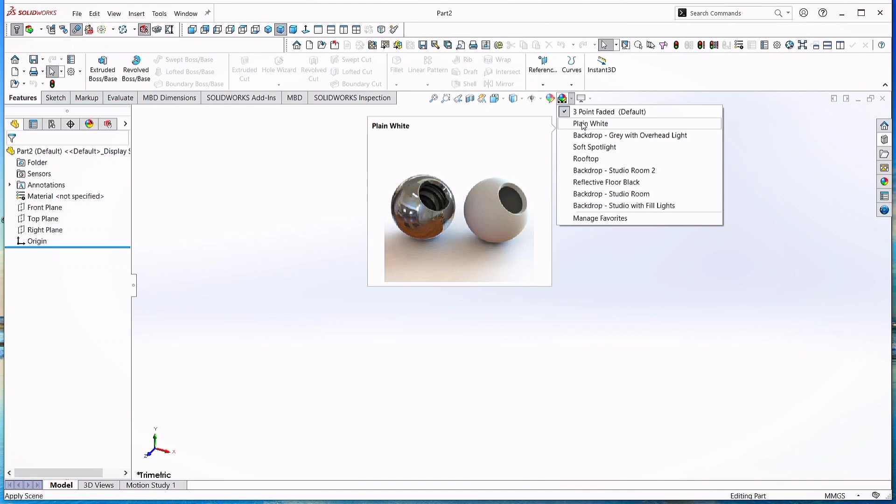Go to the visual background scene, select plain white. Click on sketch and select the right side plane. Now take the circle command, and draw a circle here in the origin. Click OK. Take the Smart Dimension command, and give the circle diameter as 32 mm, click OK. Again click OK to finish the command.

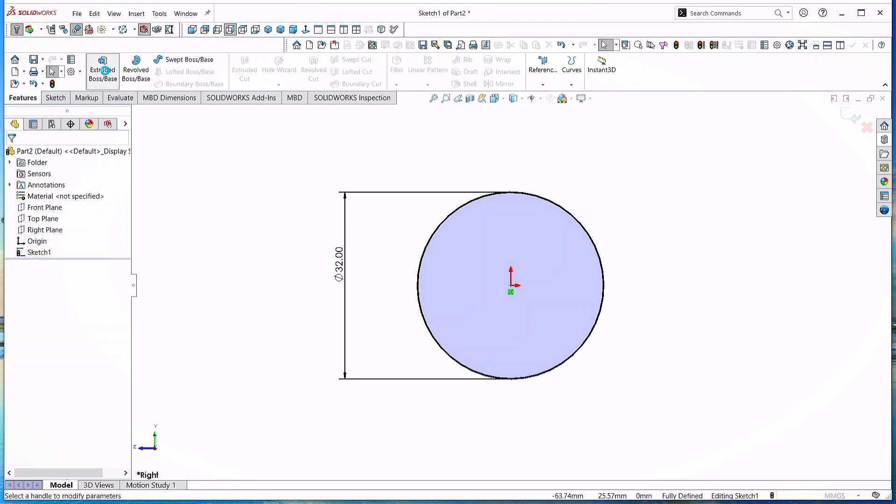Now go to the features and click Extruded Boss command. Select the mid-plane, and give the thickness as 15 mm, click OK.

Now right-click on this surface. Click on Sketch. Take the circle command and draw a circle here in the origin. Click OK. Take the Smart Dimension command, and give the value of circle diameter as 10 mm, click OK.

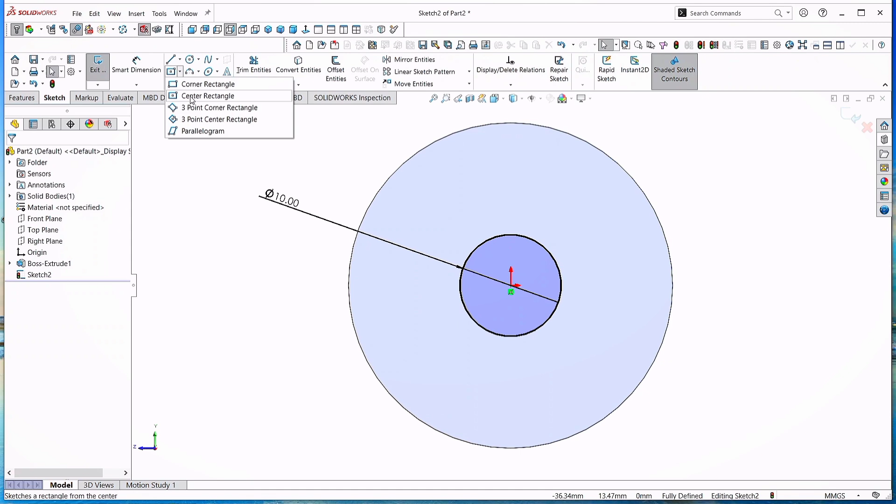Go to the sketch and select the Center Rectangle command. Now draw it here. Click OK. Take the Smart Dimension command, click on this side, give the length of the rectangle as 2 mm, and width of the rectangle is also 2 mm, click OK.

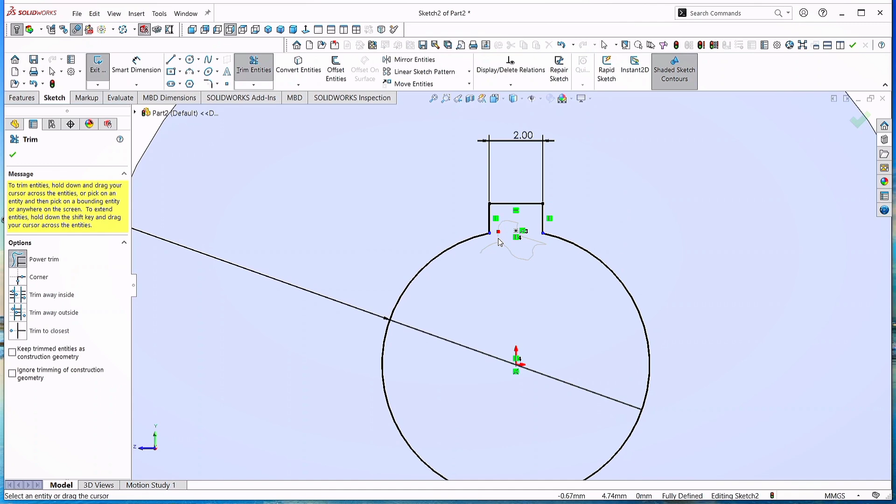Now click on Trim Entities to erase the extra lines with power trim like this. Click OK. Click on Isometric to make it normal.

Now go to Features and click on Extruded Cut command. Select Through All. Click OK. Here we see a hole with a keyway has been made.

Again click on this surface, click on Sketch. Take the Circle command and draw two circles here in the origin.

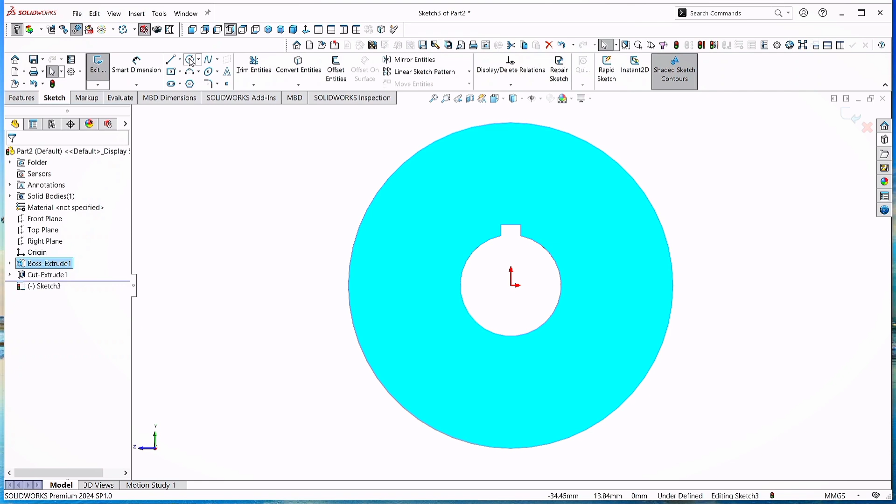Now click on Smart Dimension command. Give the circle diameter value as 25 mm. Click on the second circle and give the diameter value as 15 mm. Click OK. Again click OK to finish the command.

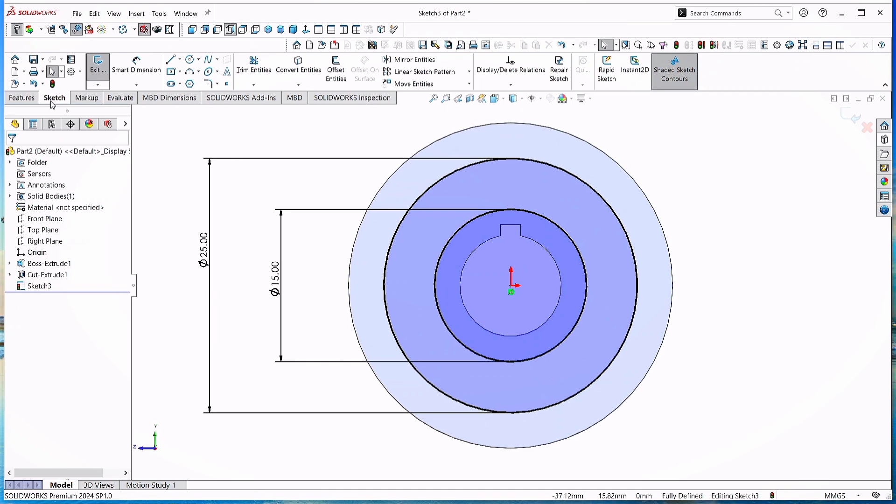Now go to the features and click on Extruded Cut command. Choose the direction as blind and give the depth as 3 mm, click OK.

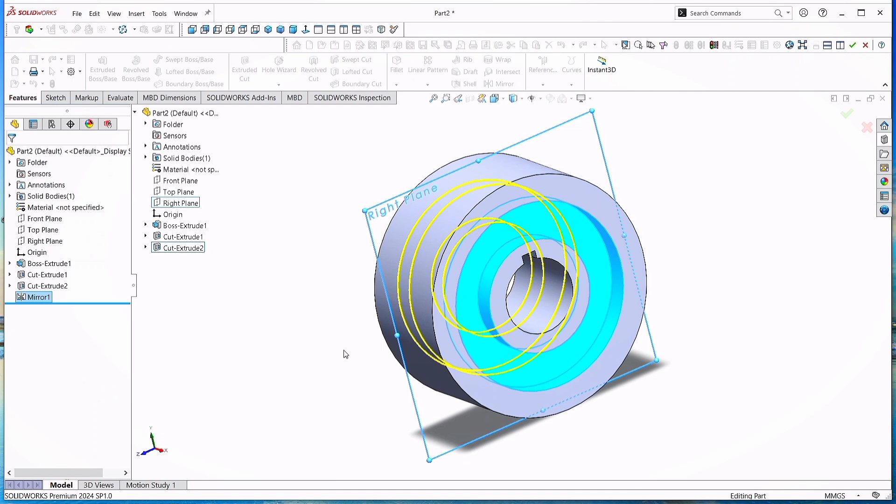To copy this feature on other side, select Cut-Extrude2. And click on Mirror command. Click here in the part settings and choose the right side plane. Click OK. Here we see the same cutting on the other side.

Now click on this surface, click on Sketch. A little zoom it. Go to the Line command and click on Center Line. Draw the center line here. Again take the Line command and draw a line here.

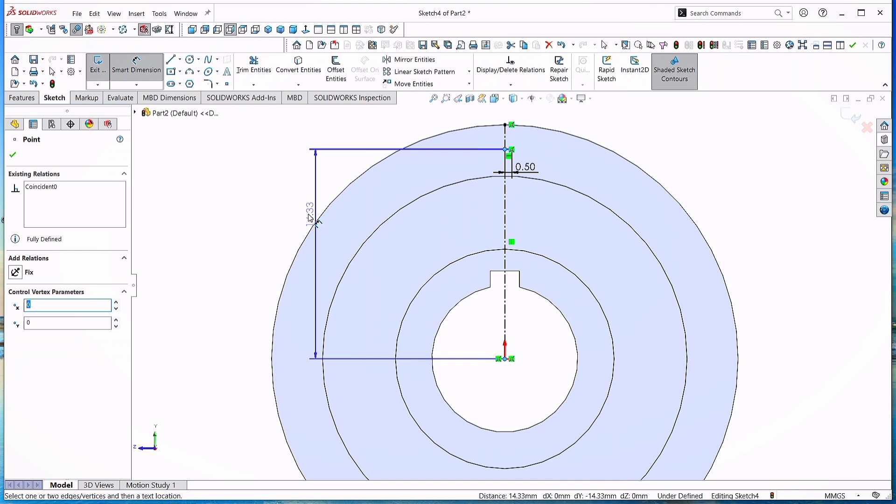Click on Smart Dimension. Give the length of this line as 0.5 mm. Click OK. Give the distance from this point to the origin point as 13.6 mm. Click OK. Again click OK to finish the command.

Now take the 3-point arc command, draw it from here to here. Click OK. Take the Smart Dimension command. And give the value from this point to this point as 1.58 mm. Click OK.

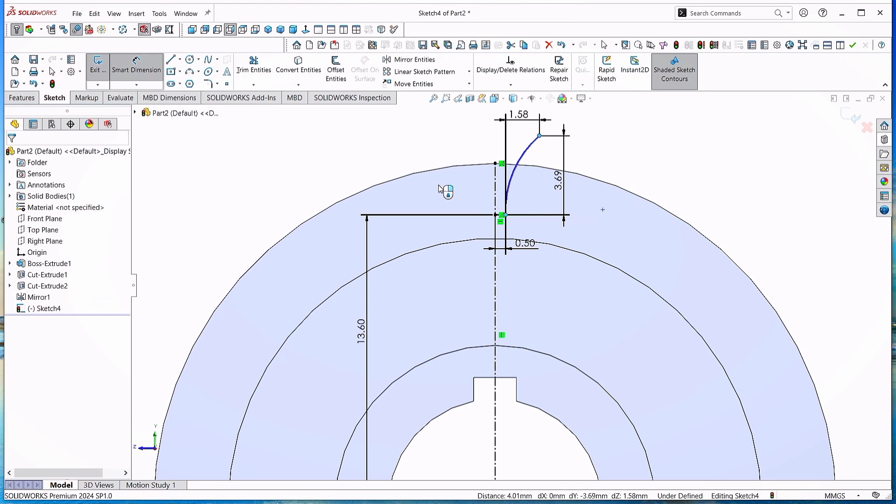Again click on these points and give the distance value as 3.28 mm. Click OK. Give the radius of this arc as 4.56 mm. Click OK. Again click OK to finish the command.

Now click on Mirror Entities. Select this arc, along this line. Choose this line as a reference to be mirror. Click OK.

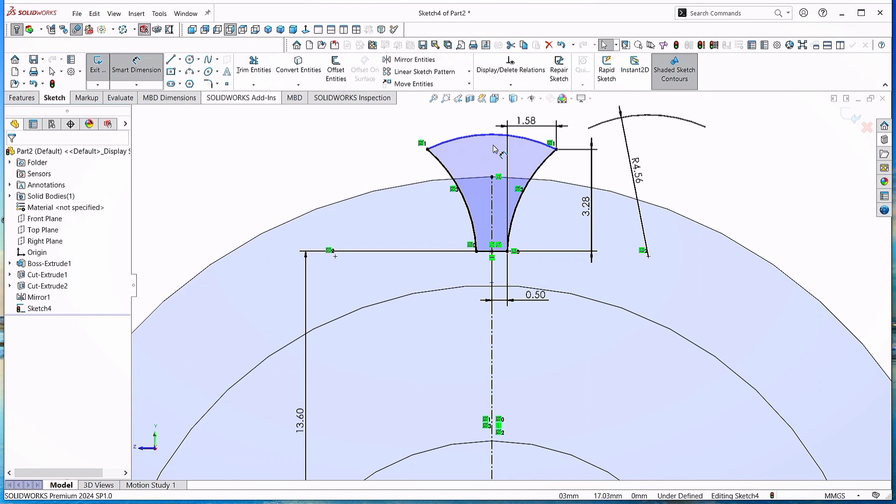Again take the 3-point arc command. Draw an arc from this point to this one. Click OK. Take the Smart Dimension command, give the radius to this arc as 18 mm. Click OK.

Now take the Fillet command. Give the fillet value as 0.03 mm. Select this corner. Click Yes. Again select this one. Click on Yes. Now click OK to finish the command.

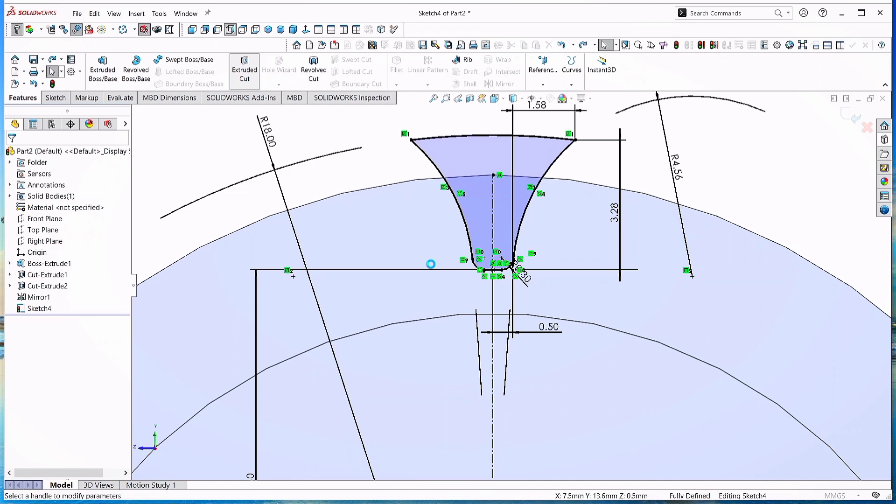Now go to the features and click on Extruded Cut command. Give the direction as through all. Click OK.

Select this feature and click on Pattern. Choose the circular pattern. Now select this hole as a reference. Give the pattern's quantity as 26, on 360 degree with equal spacing. Click OK. It looks perfect. Here we have created a spur gear of 26 teeth.

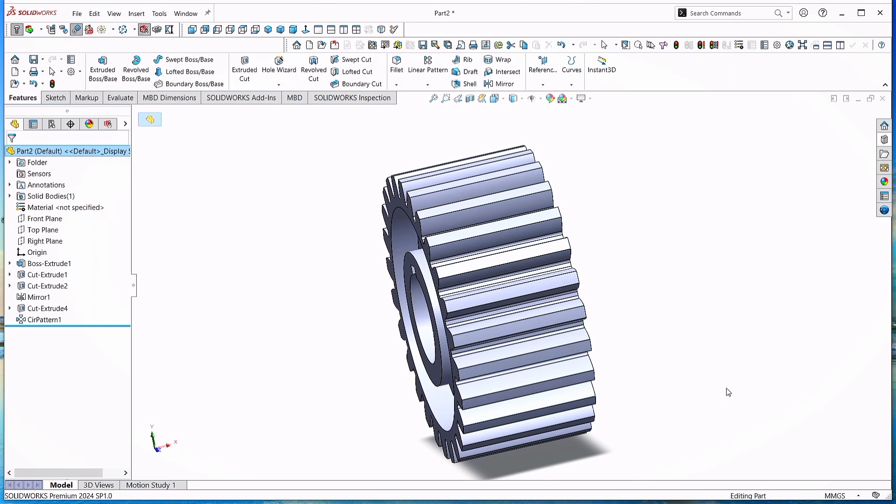Now go to the File menu, click on Save. Give the destination folder and the part name as Spur Gear and click Save. Thanks for watching.